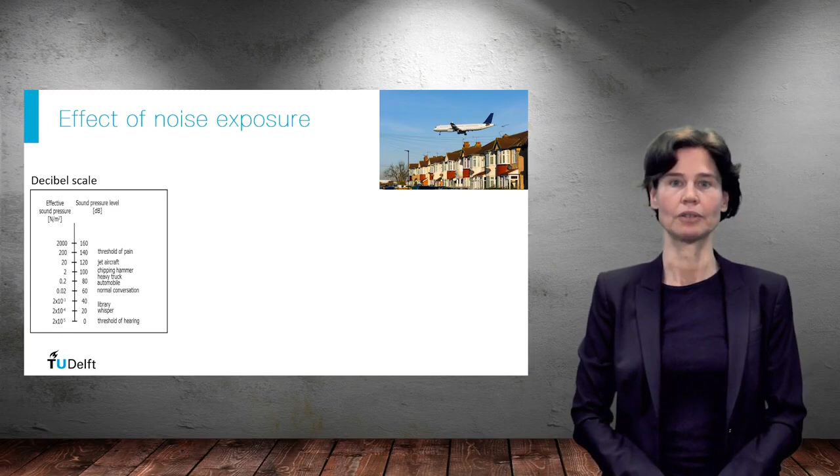Aerospace Engineering. As you probably know, sound levels are often provided in decibel values, bringing the levels that we experience in the range between 0 and 140 to 160 dB. Considering the levels of aircraft noise, we see a steady decrease of up to 25 dBs over the years. Reason is mainly the use of high bypass ratio turbofan engines, resulting in a significant decrease in engine noise. However, the effect of these decreased noise levels is at least partially counteracted by the increase in the number of

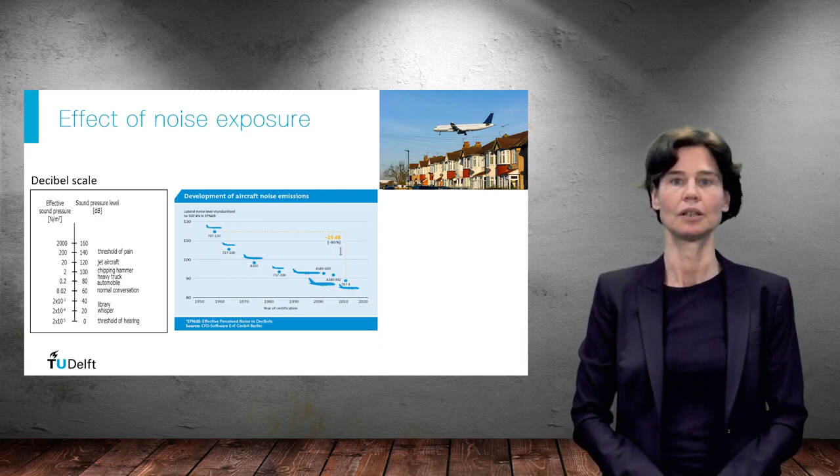flights. When expressing the levels of aviation-induced noise, a method is needed that combines the noise levels from all aircraft during a day, month, or a year. This metric is the so-called LDEN metric. It determines the average of all single event levels. In the averaging, a penalty is applied to the levels corresponding to events in the evening and in the night. This penalty is 5 dB for events in the evening and 10 dB for events during nighttime.

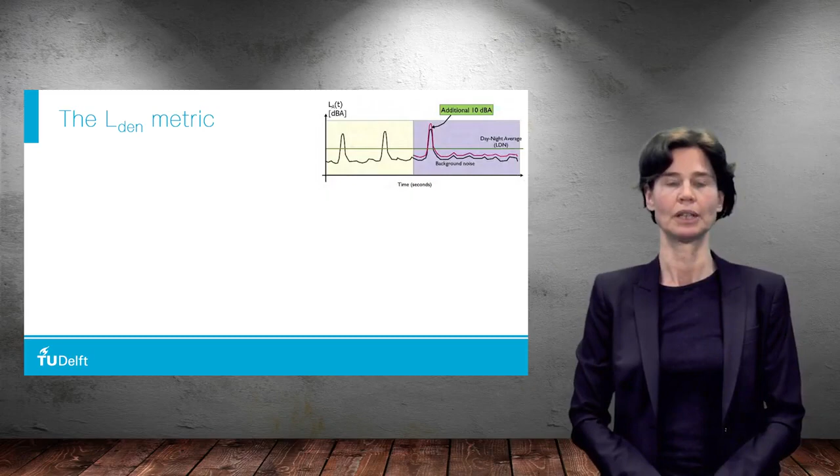It is important to realize what is actually represented by changes in LDEN. As you can see in the table, a change in LDEN of 0.1 dB corresponds to a 2.3% change in the number of flight movements, whereas a 3 dB change requires either a doubling or a halving of the number

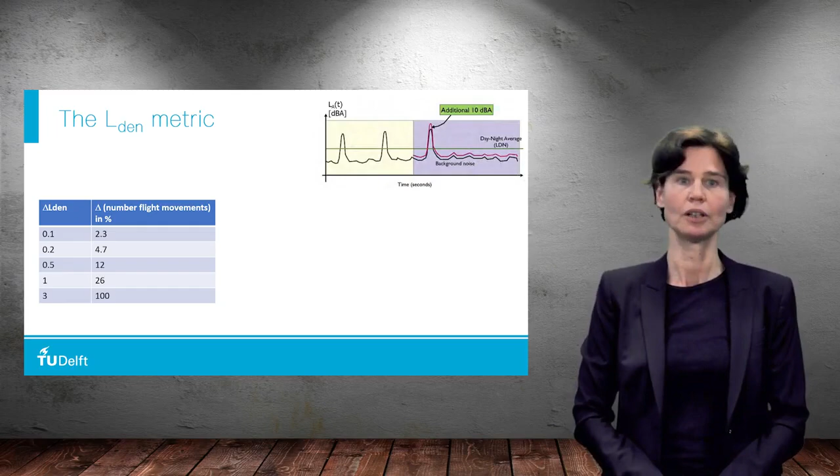of flight movements. As a final step in determining the annoyance, the share of highly annoyed people can be determined from the LDEN value in a particular area by using the so-called dose-response relation. As you can see from the plot, an LDEN of 58 dB results in 30% of the people to be highly annoyed. What you can also see is that the dose-response relation differs for the various forms of transport.

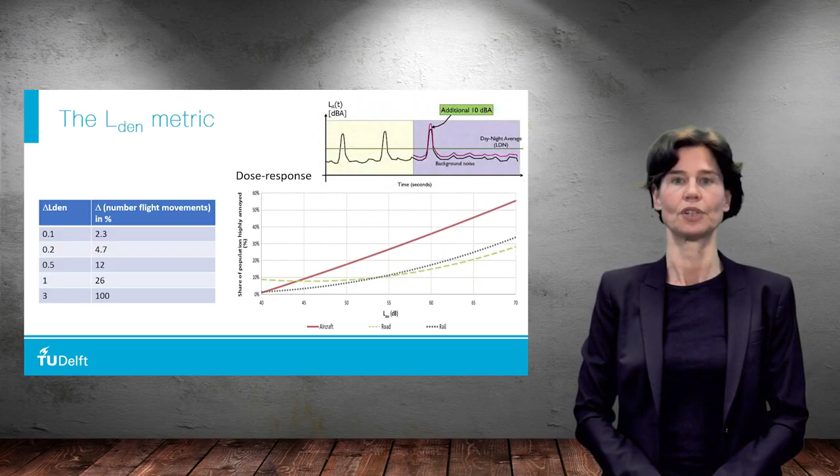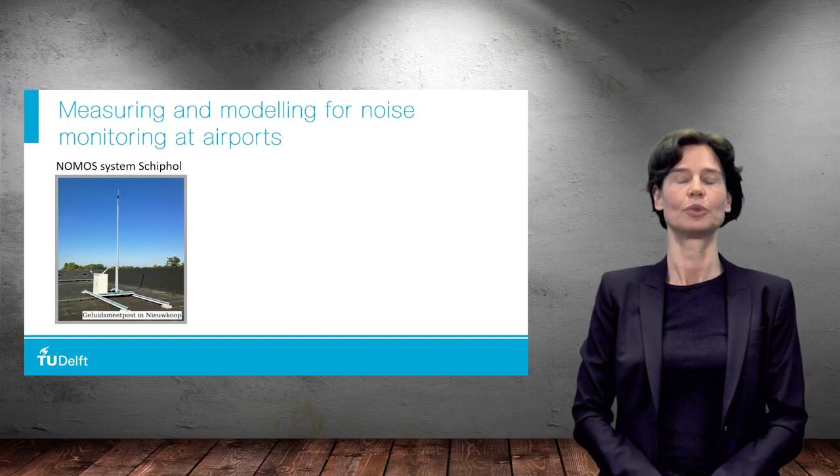Values for LDEN can be obtained through modeling and measurements. For example, around Schiphol Airport in the Netherlands, the NOMOS measurement stations have been installed, recording the noise from aircraft. In addition, models are available that provide a full overview of the LDEN values in the area around airports. In the figure, both these predictions and the measurements are shown.

When considering the measurements over the years 2006 to 2019 from all NOMOS stations, a trend of decreasing noise levels is observed. The measurements indicate roughly a 0.4 dB decrease per year. Actually, we're talking about dBA levels, where the sensitivity of the human ear is accounted for. In case the fleet had not changed, this trend would indicate a decrease of 9.6% in the number of flight movements per year. However, we know that actually the number of flights in this period did change from 400,000 to

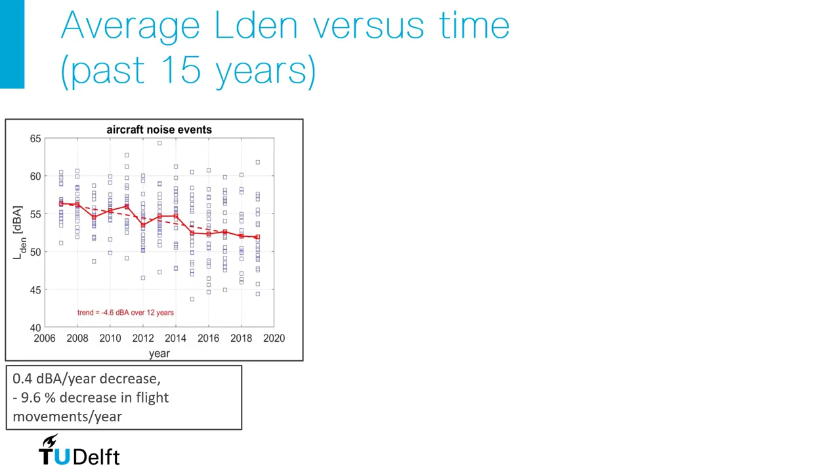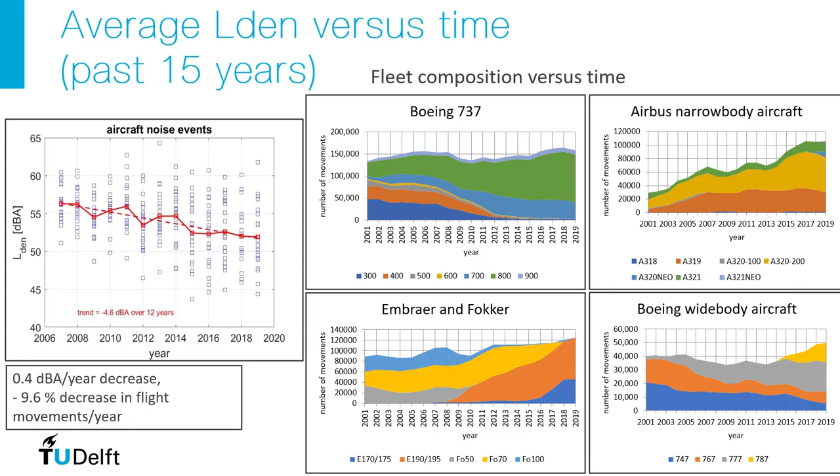500,000. The decrease in noise levels is thus the effect of fleet renewal, where more and more aircraft are introduced that emit less noise. The trends in the fleet are visualized in the plots on the right. The main factors making the aircraft more silent are the change from 4 to 2 engines, the use of liners and improvements in lining materials to reduce the engine noise, improved aircraft geometries, and operations.

Looking at the near future, there's a trend for improved modeling and measurement techniques. Regarding models, the trends are towards models that predict the noise on a component level, such as flaps, slats, landing gear, but also the noise from the engine jet and fan. In this way, it's possible to identify the dominant noise sources in the various flight phases and work towards making these components more silent. In addition, these models can be used to determine low noise operations. Of course, these models also provide more accurate noise footprints, essential in informing the public.

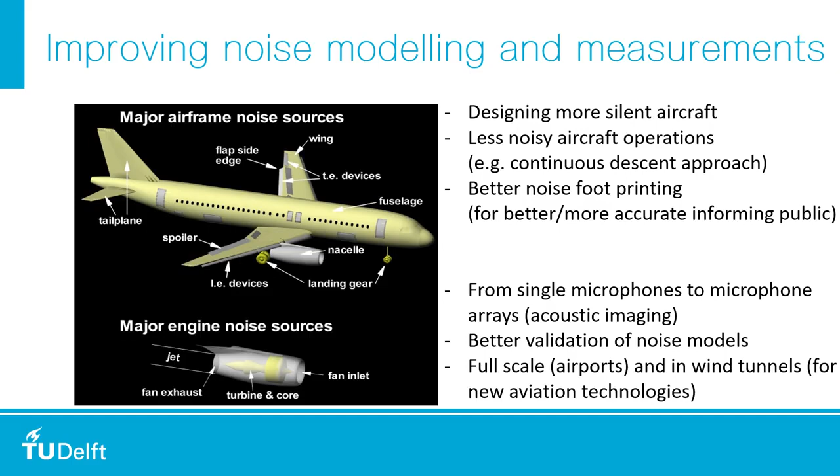Regarding measurements, the trend is to go from single microphone measurements to measurements with arrays consisting of multiple microphones. These latter allow for identifying the various noise sources that contribute to the total noise level. These measurements can then be used to validate the noise models on a component level, either for full-scale aircraft in operational conditions or in wind tunnels when determining the noise for new aviation technologies.

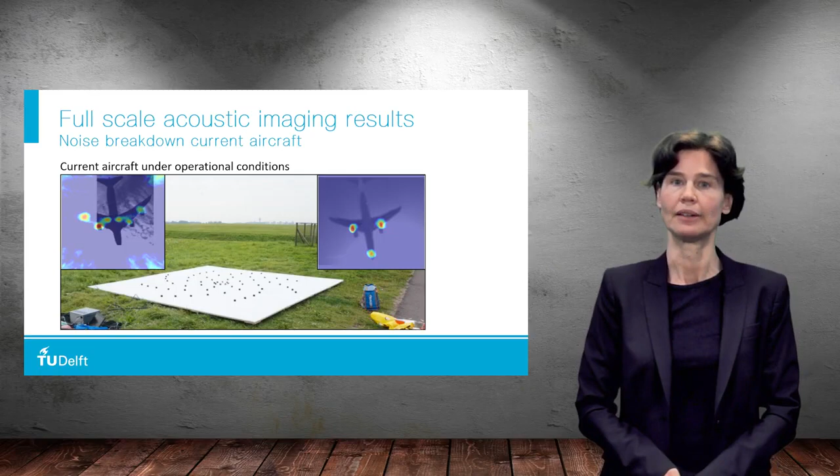Another example of the array measurements is presented here, where measurements were taken of a Cessna Skymaster. Quantifying and modeling propeller noise is highly relevant again, as propellers are expected to play an important role in future aviation technologies, due to their fuel efficiency. By using an acoustic array and proper analysis, the noise radiated by the propellers can be separated from all other noise sources, as shown in the image.

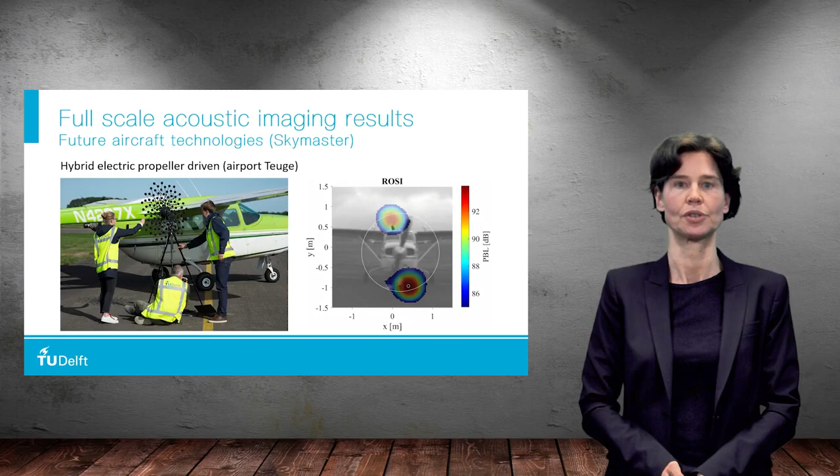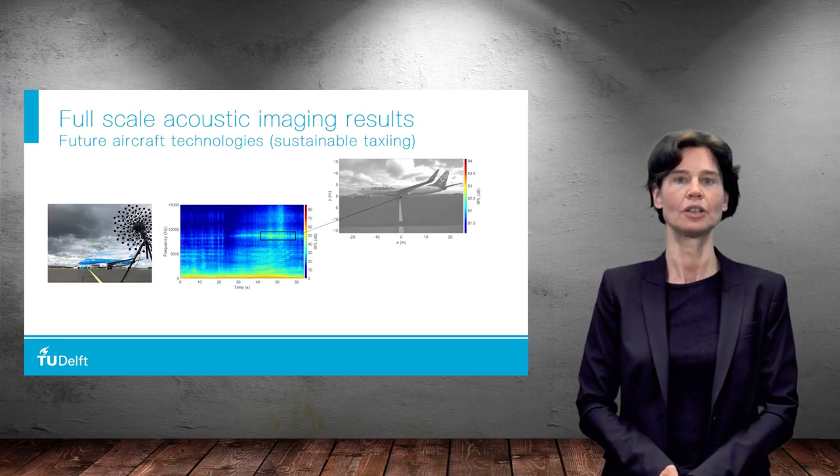First, a so-called spectrogram is made using the measurements from a single microphone. Such a spectrogram indicates the frequency content as a function of time. Since the aircraft and taxibot are moving relative to the array, this frequency content indeed changes as a function of time, as is seen from the figure. By selecting the frequency ranges with clear signals being present, the source per frequency can be identified.

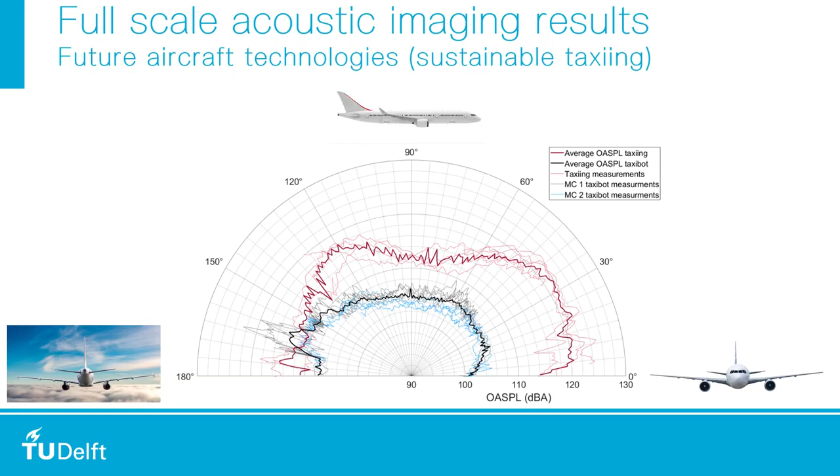As stated before, assessing aircraft noise for current and future technologies consists of both measurements and modeling. Examples of such new aviation technologies are new aircraft geometries, such as the flying V, or extensive use of drones. Modeling the noise sources on a component level will then provide the expected noise levels.

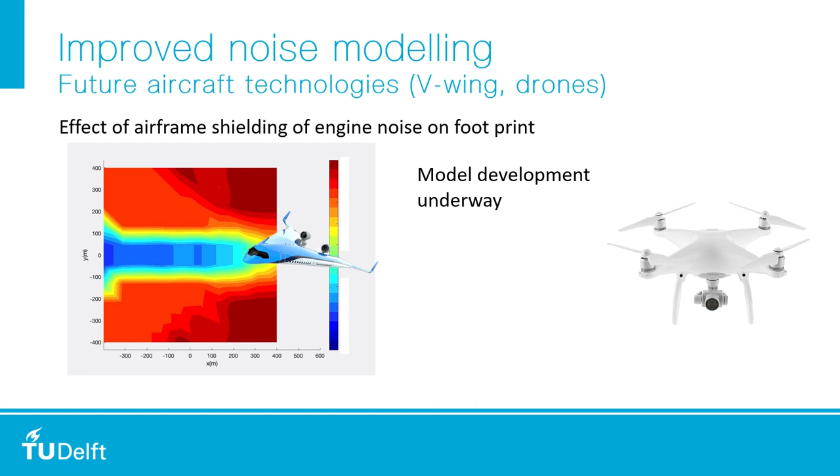However, also effects such as shielding of the engine noise by the geometry need to be accounted for in order to ensure accurate modeling. The figure shows such a prediction, where blue colors indicate a decrease in levels due to the shielding of the engine noise by the airframe. Red indicates no shielding. With this, I would like to thank you for your attention.